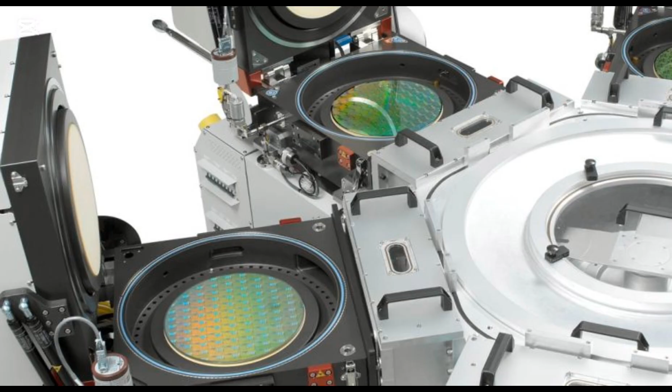1. Photolithography equipment: steppers and scanners project circuit patterns onto silicon wafers using UV light. Mask aligners align photomasks with wafers in older or less advanced fabs.

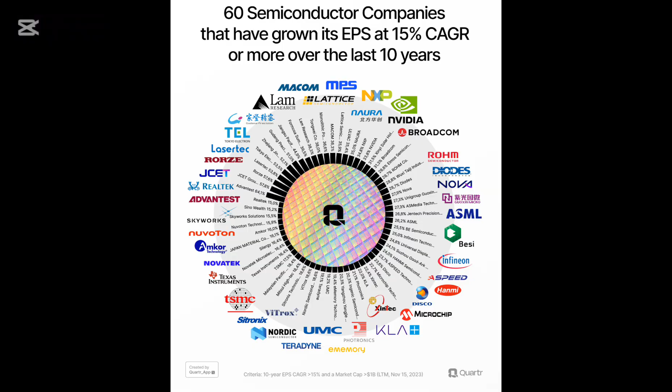2. Etching tools: Reactive ion etching (RIE) uses plasma to etch fine features into wafers. Wet etching equipment uses chemicals to etch materials selectively.

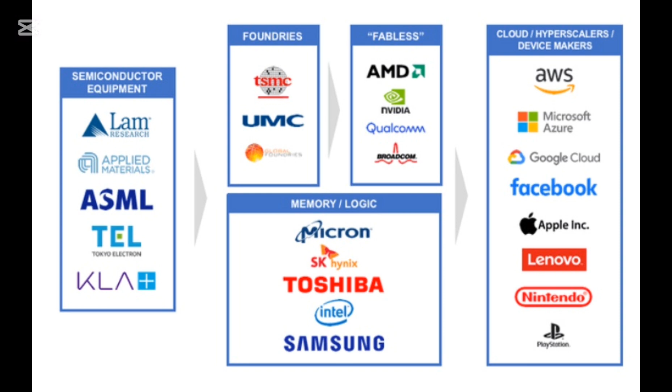3. Deposition systems: Chemical vapor deposition (CVD) deposits thin films using chemical reactions. Physical vapor deposition (PVD) includes sputtering and evaporation systems. Atomic layer deposition (ALD) offers precise, atomic-scale film deposition.

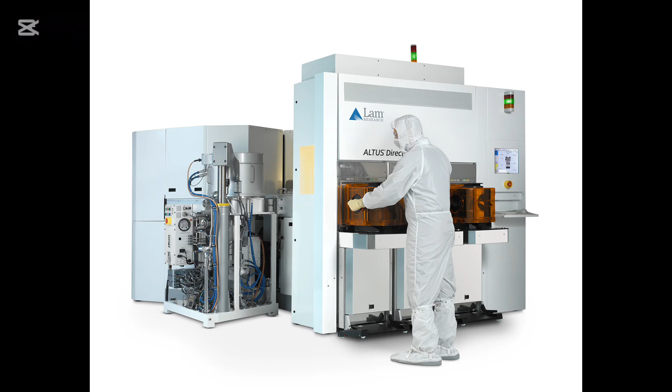4. Ion implantation tools inject dopants, or impurities, into wafers to modify electrical properties. 5. Chemical mechanical planarization (CMP) tools polish wafers to achieve flat surfaces for multi-layer stacking.

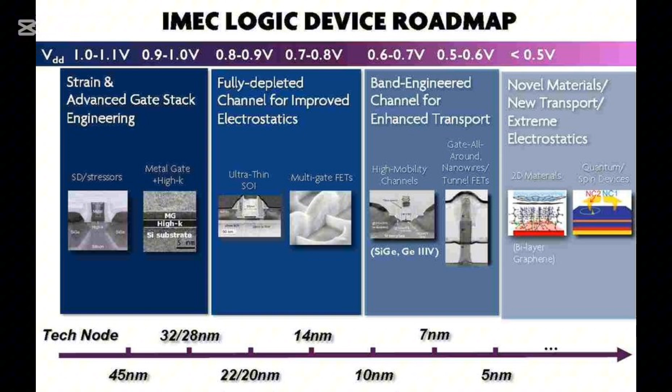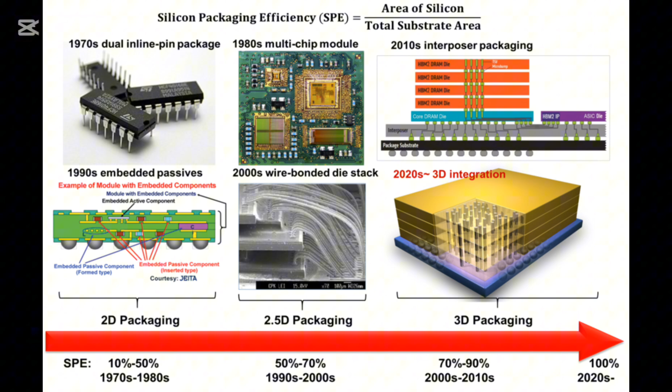6. Wafer inspection and metrology tools include scanning electron microscopes (SEM) for nanoscale imaging, atomic force microscopes (AFM) for surface topology, critical dimension (CD) measurement systems for line width accuracy, and ellipsometers for thin film thickness measurement.

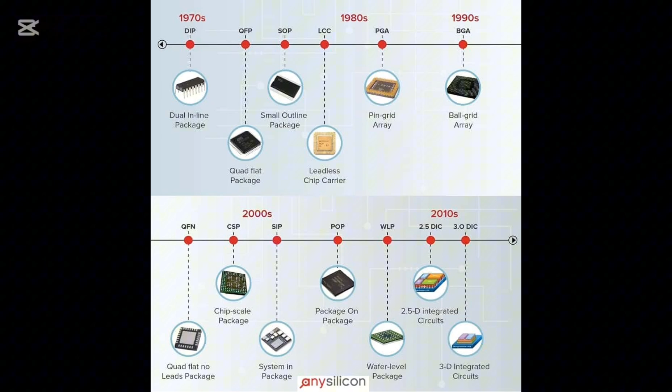7. Cleaning systems: wet bench stations use chemicals like HF to clean wafers. Megasonic cleaners use sound waves in liquid to remove particles.

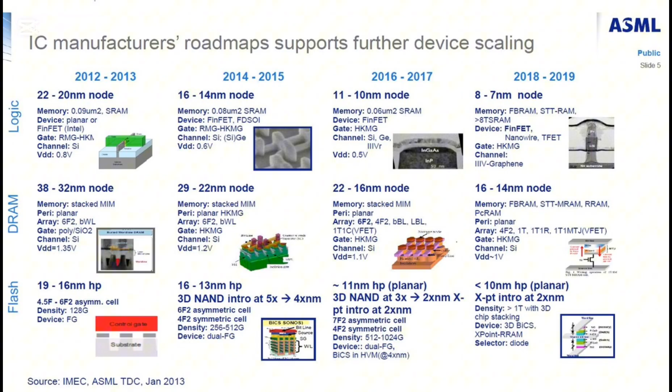8. Dicing and packaging tools: wafer dicers cut wafers into individual chips. Die bonders and wire bonders assemble and connect chips. Encapsulation machines seal the chips in protective packages.

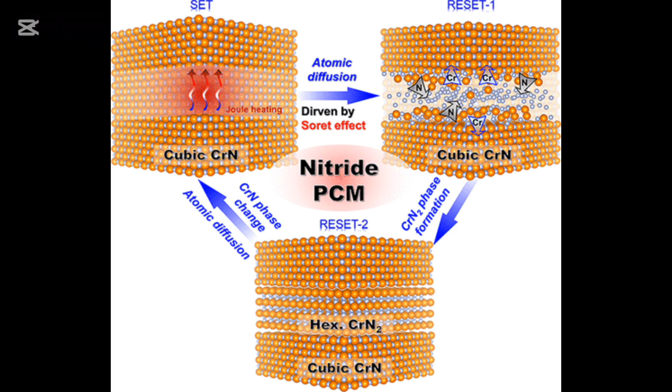9. Test equipment: parametric testers measure electrical characteristics, and automated test equipment (ATE) is used for functional chip testing.

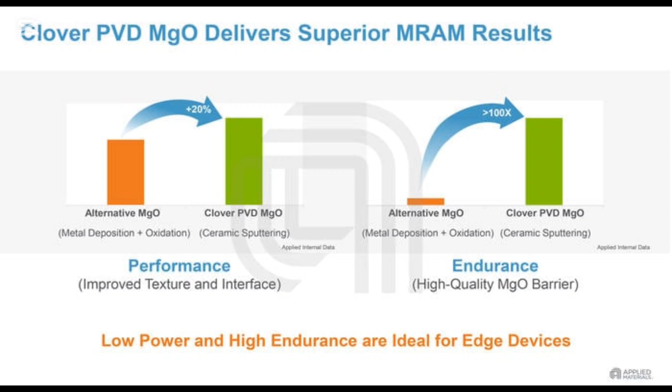As of 2024, the top 5 semiconductor manufacturing equipment suppliers, ranked by revenue and technological leadership: 1. ASML, Netherlands, specializes in photolithography equipment, particularly extreme ultraviolet (EUV) systems. ASML is the sole supplier of EUV lithography machines, essential for producing advanced chips at 7 nanometers and below. 2024 revenue: over $30 billion, leading the global semiconductor equipment market.

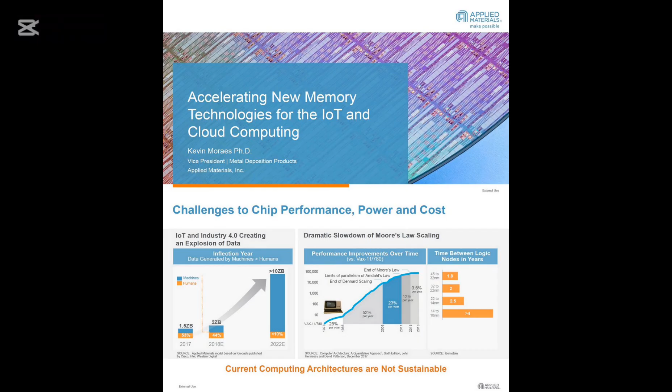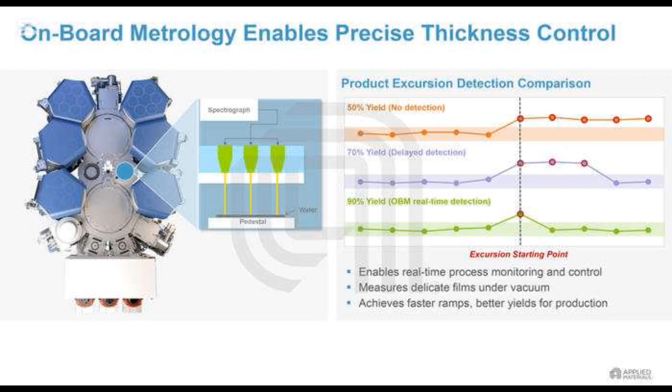2. Applied Materials, USA, specializes in comprehensive semiconductor fabrication equipment, including deposition, etching, and inspection tools. Known for its broad product portfolio and innovation in materials engineering. 2024 revenue: approximately $25 billion, ranking second globally.

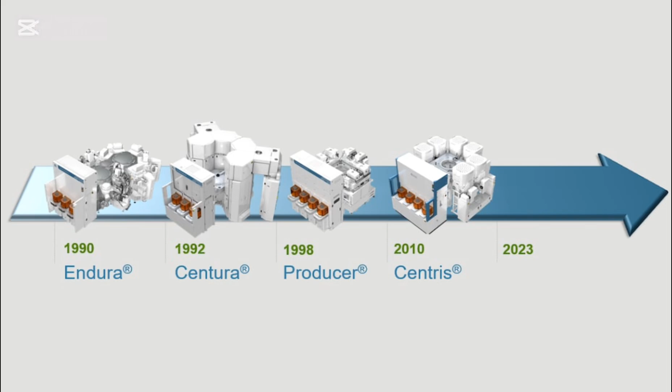3. Lam Research, USA, specializes in etching, deposition, and cleaning equipment for wafer fabrication. A key supplier for advanced semiconductor manufacturing processes. 2024 revenue shows significant growth, maintaining a strong position in the top 5.

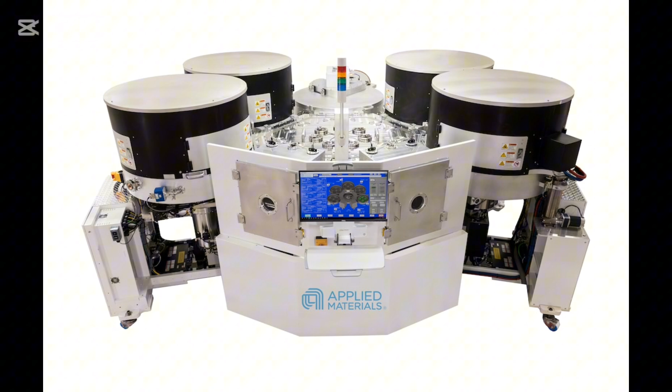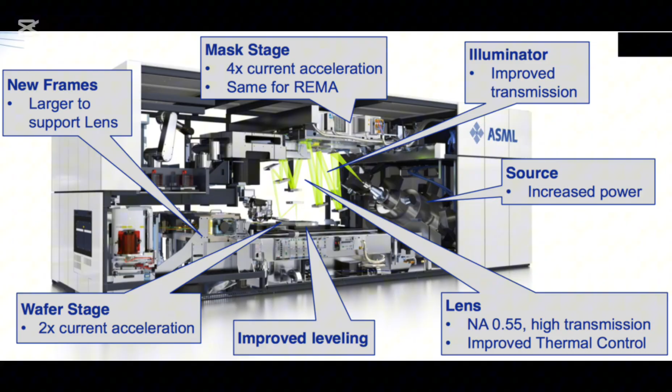4. Tokyo Electron, Japan, specializes in coaters, developers, deposition tools, thermal processing systems, and etching equipment. Japan's leading semiconductor equipment supplier with a global presence. 2024 revenue shows continued growth, securing the 4th position worldwide.

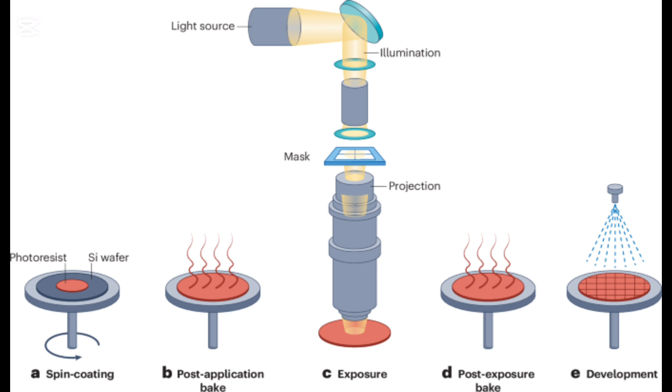5. KLA Corporation, USA, specializes in process control and yield management solutions, including defect inspection and metrology systems. Dominant in the semiconductor inspection and metrology segment. 2024 revenue shows strong performance, rounding out the top 5 equipment suppliers.

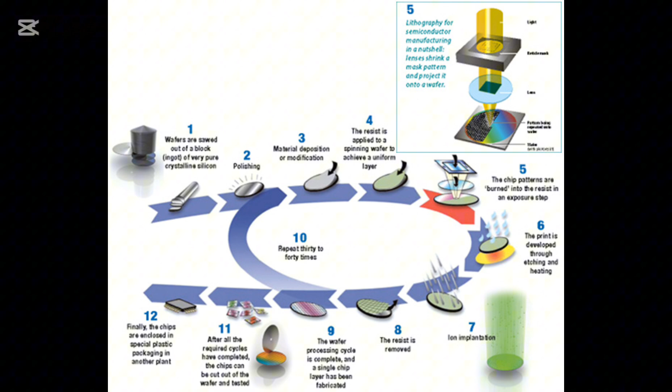In the semiconductor manufacturing equipment (SME) industry, the distribution channel is highly specialized and differs from typical consumer electronics due to the complexity, cost, and technical support required. Here's a breakdown of how distribution works for companies like ASML, Applied Materials, Lam Research, Tokyo Electron, and KLA.

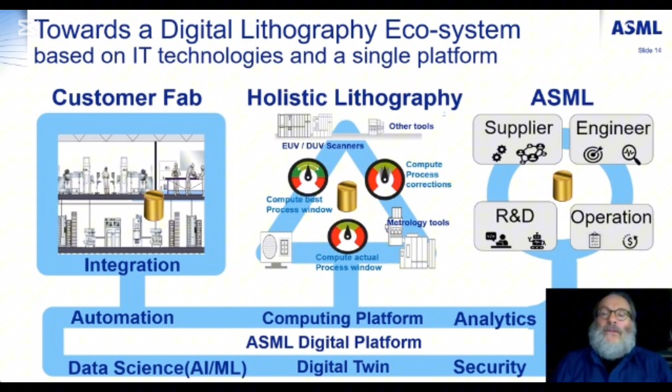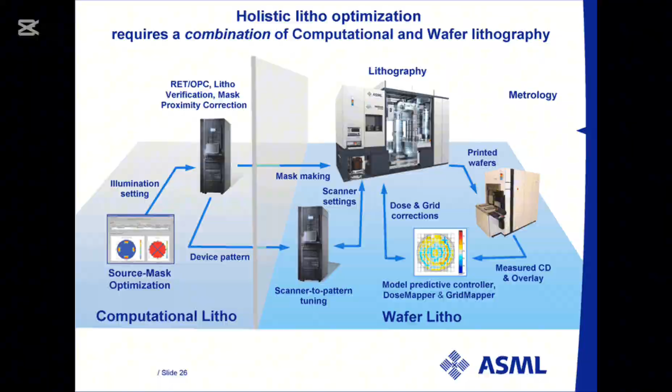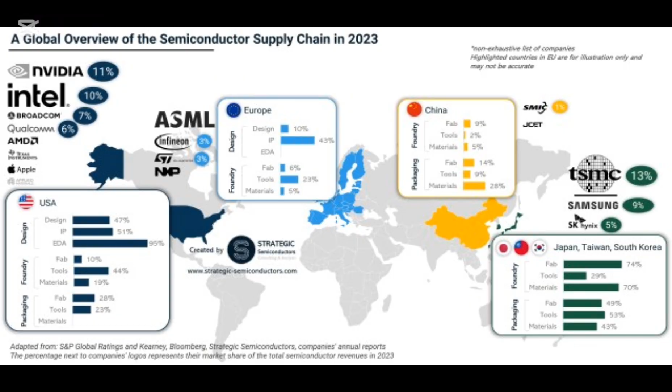Typical distribution channel structure: direct sales is the primary channel. Major OEMs (original equipment manufacturers) like Intel, TSMC, Samsung, and GlobalFoundries buy directly from equipment vendors. The transaction includes not just the tool, but installation, customization, training, and ongoing support. This channel accounts for the vast majority of sales due to the high value of individual transactions—millions to hundreds of millions per unit—the need for deep integration into customer fab workflows, and strong confidentiality and collaboration on future node development.

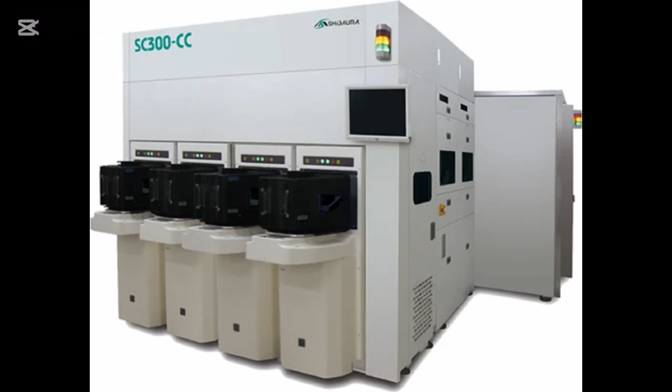Regional sales and service subsidiaries: all top equipment vendors operate regional subsidiaries, e.g., Applied Materials Japan, Lam Research Korea. These offices handle localized sales and marketing, customer service and maintenance, spare parts logistics, and technical consulting and training. This structure helps vendors maintain tight relationships and respond quickly to fab requirements.

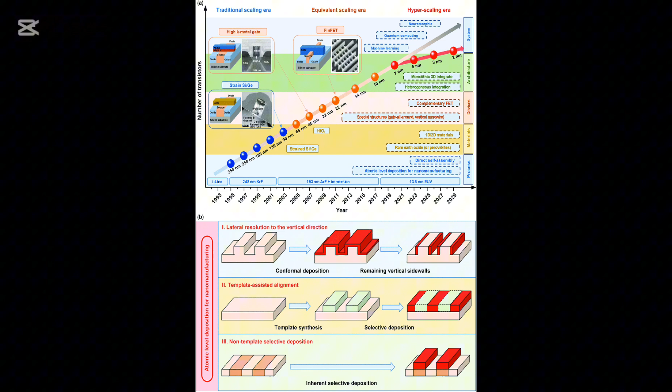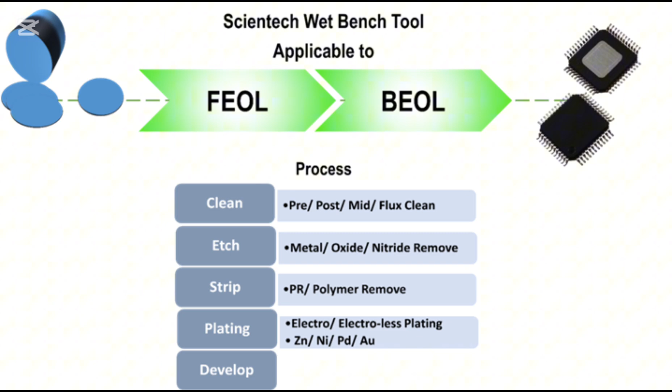System integrators and strategic alliances have limited use. In rare cases, vendors partner with system integrators for emerging markets, e.g., India or Southeast Asia, and mid-size fabs that can't afford full-scale direct vendor support, such as working with foundry builders or government-funded semiconductor initiatives.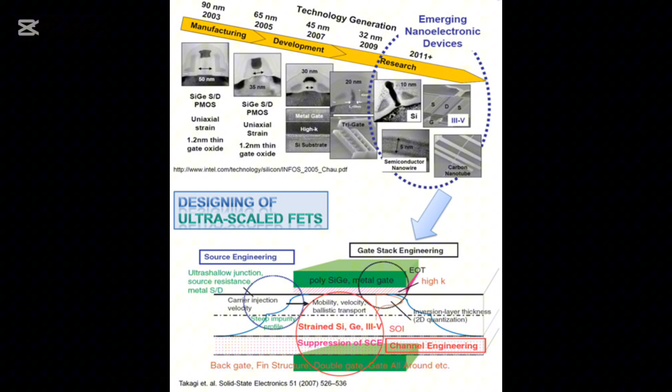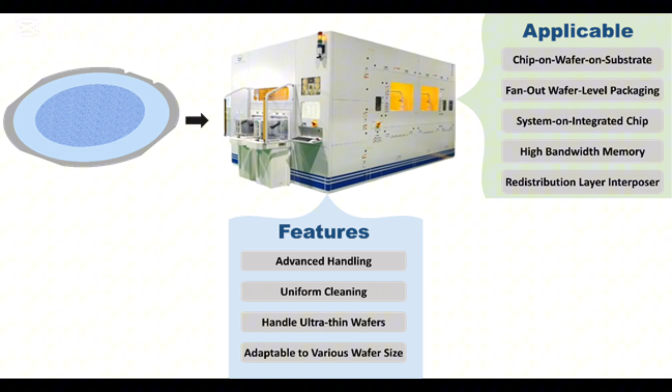Aftermarket and refurbished tools dealers: older generation tools, e.g., for 28 nanometers and above nodes, are often sold through secondary markets. Companies like Rena Technologies and used equipment surplus dealers refurbish and resell. Buyers include smaller fabs, universities, and R&D labs.

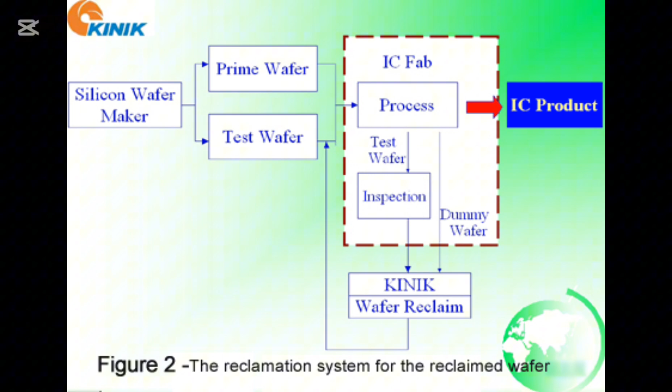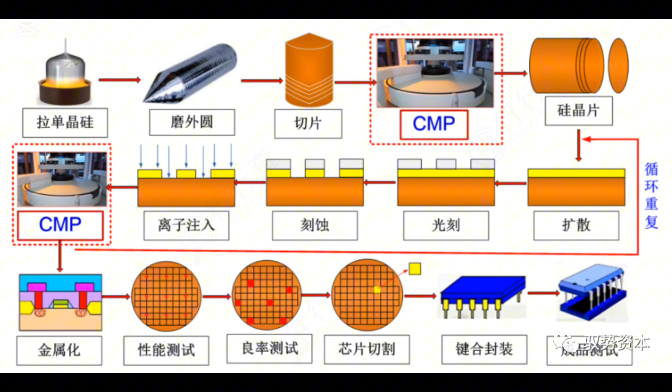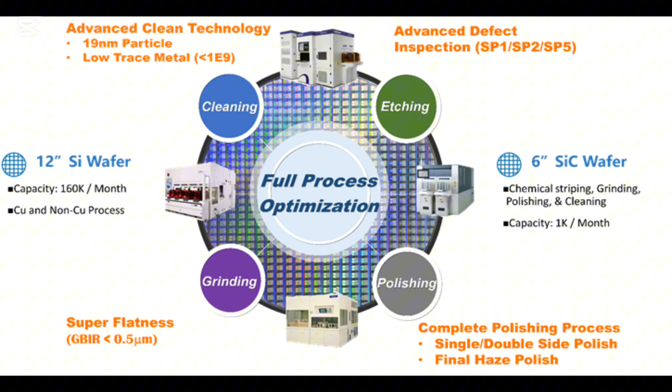Key enablers in distribution: field service engineers (FSEs) are crucial for installing and maintaining equipment. Customer support agreements (CSAs) are long-term support contracts for uptime guarantees. Parts and consumables supply chain provide real-time logistics to avoid fab downtime. Fab integration teams work directly with customers during process development and ramp-up.

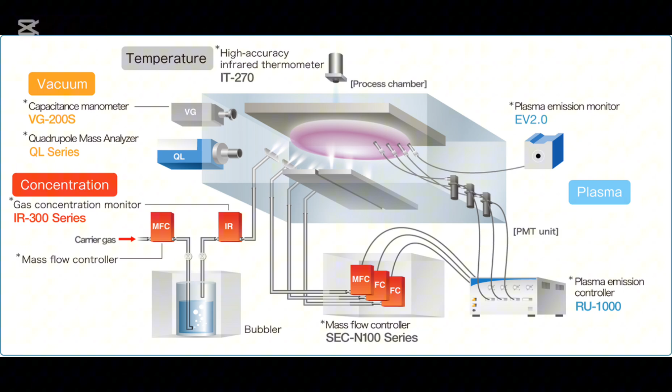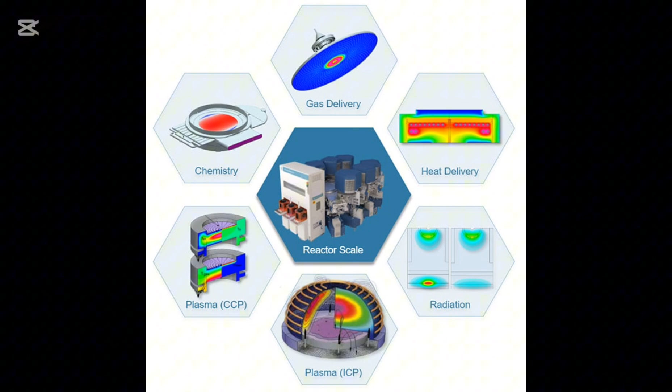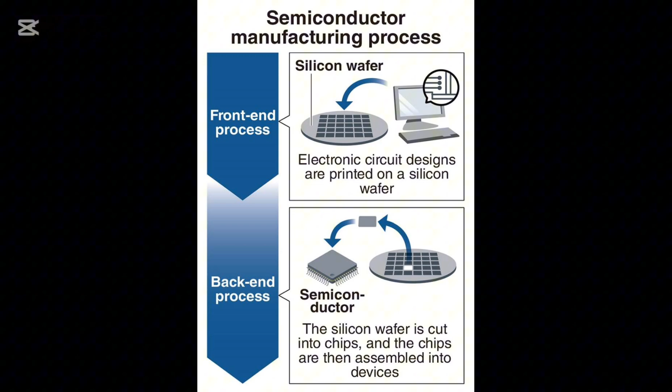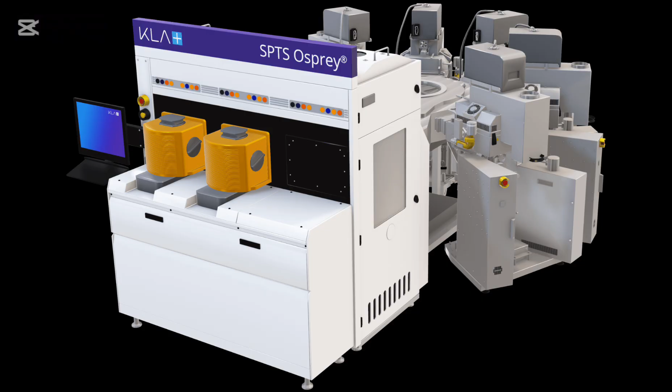The major customers of top semiconductor manufacturing equipment (SME) suppliers are primarily large-scale chip manufacturers and foundries, also known as integrated device manufacturers (IDMs), and pure-play foundries. These companies build and operate semiconductor fabs and invest billions in advanced manufacturing tools.

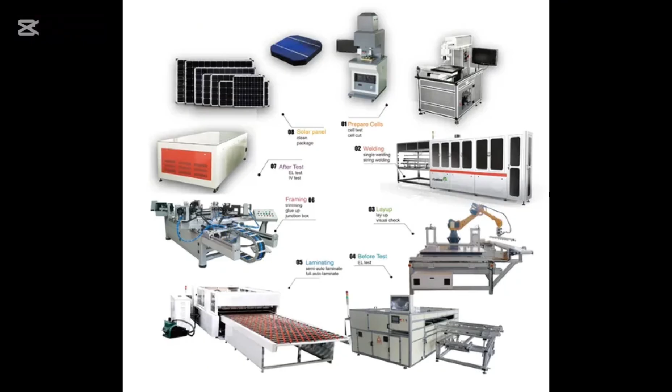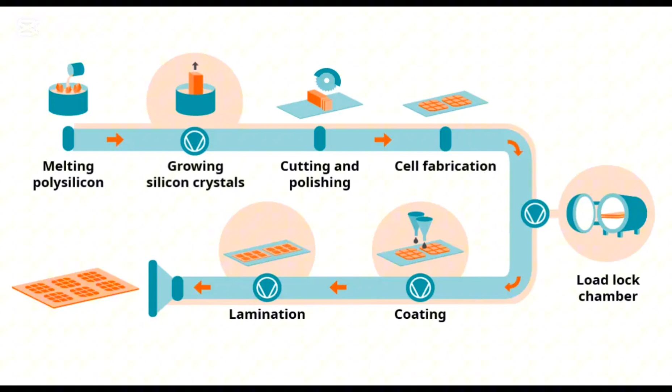Top major customers of SME companies: 1. TSMC (Taiwan Semiconductor Manufacturing Company), a customer of ASML, Applied Materials, Lam Research, Tokyo Electron, and KLA. As the world's largest pure-play foundry, it has huge demand for advanced lithography, EUV, deposition, and etching tools. Purchases include EUV scanners, etch and deposition equipment, and metrology tools.

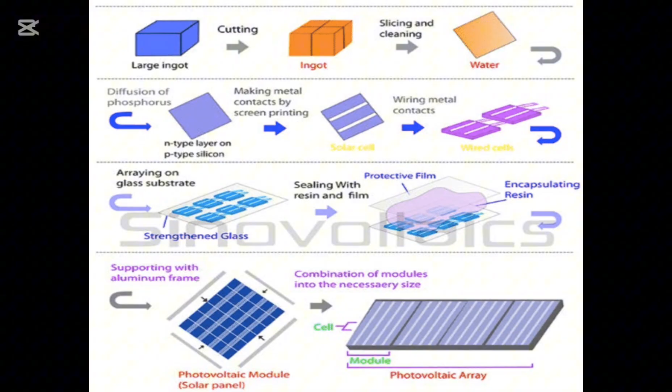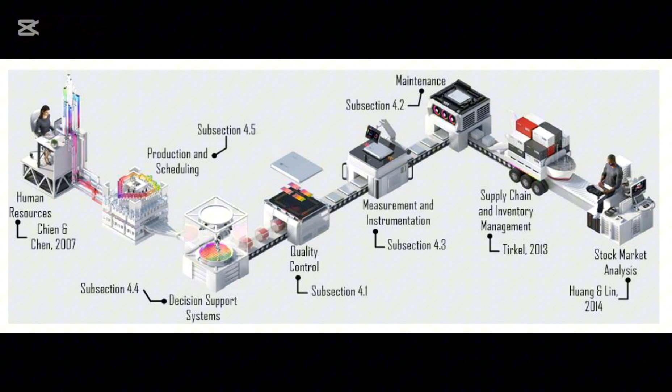2. Samsung Electronics, South Korea, a customer of all top 5 vendors. It is a major player in both memory (DRAM, NAND) and logic foundry production. Purchases include high-end fab tools for both memory and logic nodes, including EUV from ASML.

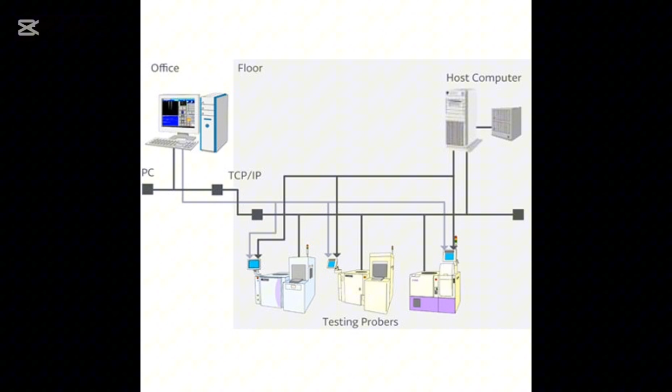3. Intel, USA, a customer of ASML, Applied, Lam, KLA, and Tokyo Electron. It is transitioning to leading-edge nodes, with big investment in EUV and process control. Purchases include advanced lithography, process control systems, and atomic layer deposition (ALD).

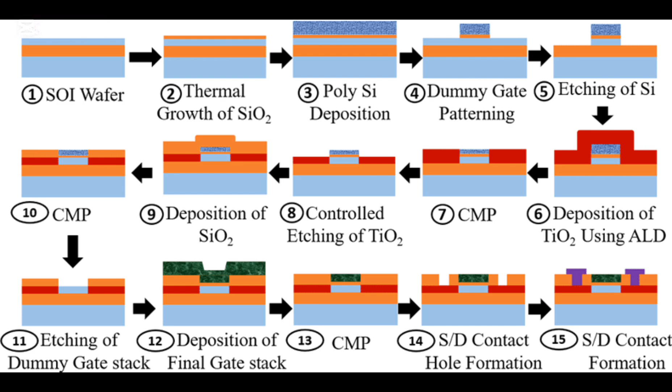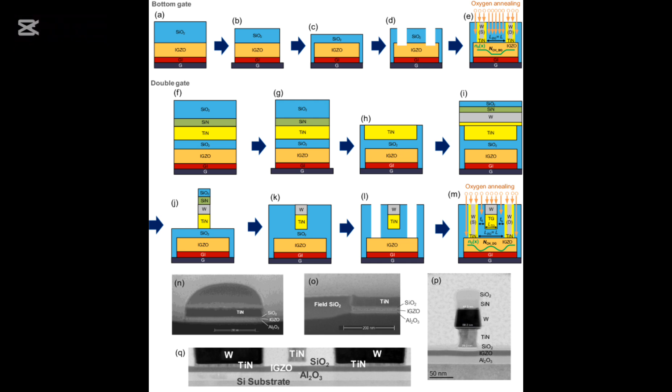4. SK Hynix, South Korea, a customer of Applied, Lam, KLA, and Tokyo Electron. It is a global leader in DRAM and NAND production. Purchases include high-throughput etching and deposition tools tailored for memory.

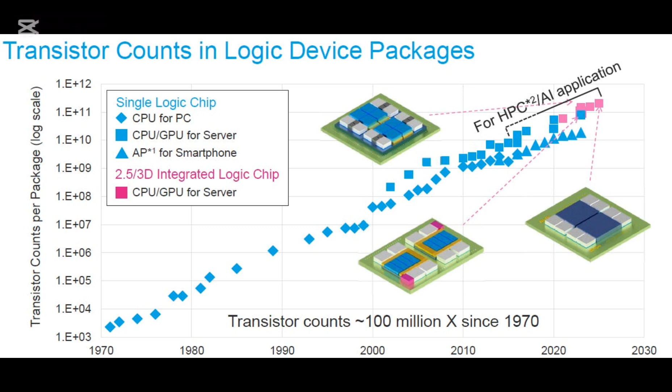5. Micron Technology, USA, a customer of Applied Materials, Lam Research, Tokyo Electron, and KLA. It focuses on DRAM and NAND memory, and invests in high-volume manufacturing tools.

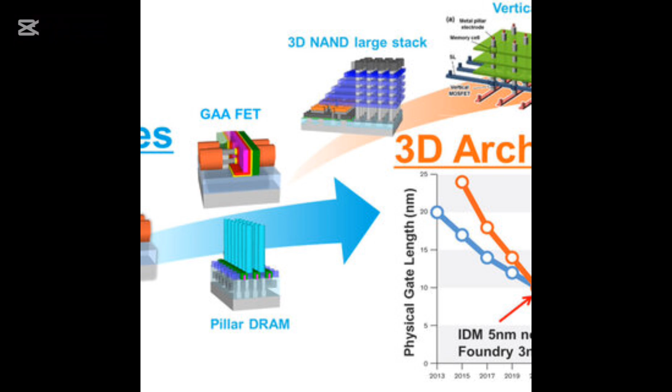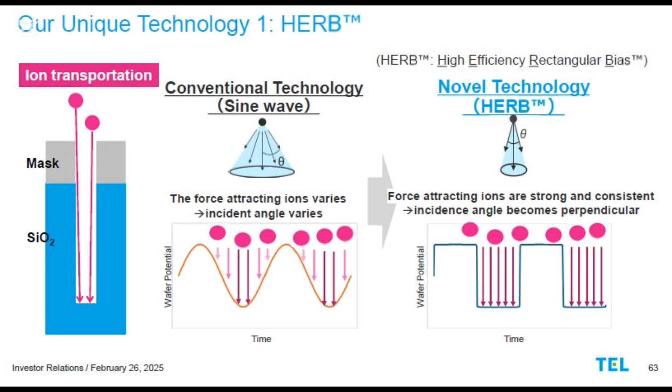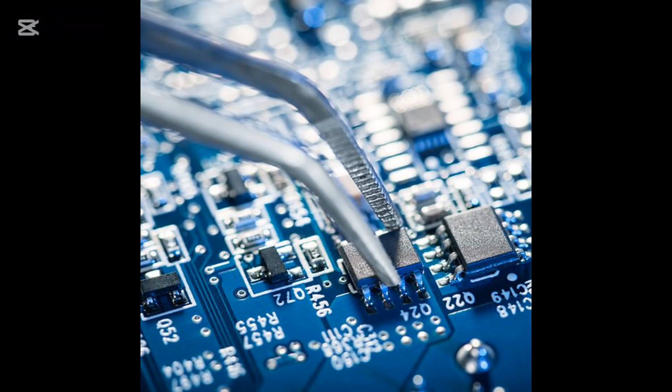Note on confidentiality: many equipment orders are under NDAs or made through framework agreements, so exact customer tool pairings are sometimes undisclosed. However, public financial disclosures and industry reports provide a clear picture of these major relationships.